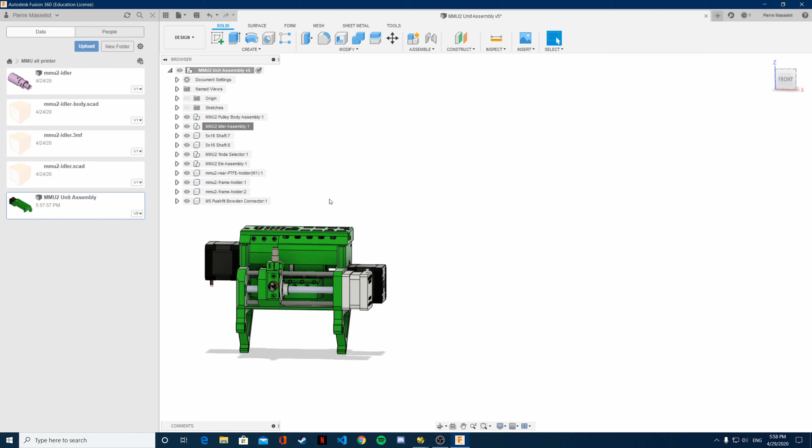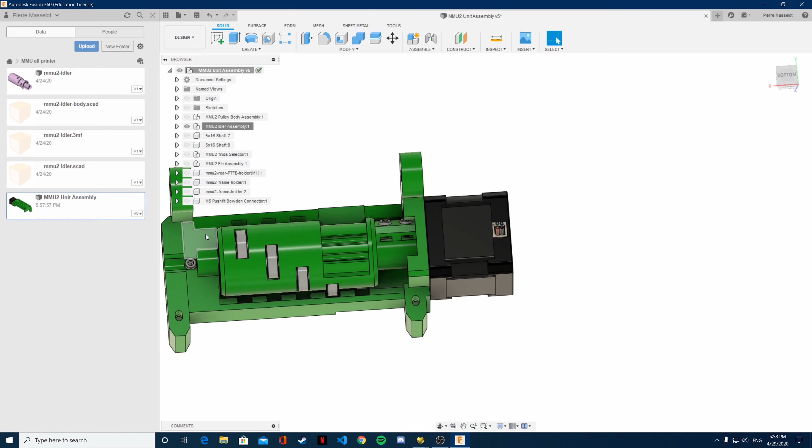So in this video I will show you the modifications that I did to the idler body. So I'm going to isolate the idler assembly right here. And so I've shown you previously the modifications I've done to the idler, which were bigger bearings and replacing the metal rod right here with a 3D printed one, so that you don't need to buy any extra rods, and replacing that bearing inside the idler into a bearing mount on the idler body.

I am currently doing another modification which I've not included in the video, which is making the tolerances in the motor shaft mount a little bit bigger, because I had problem fitting the motor on the previous model.

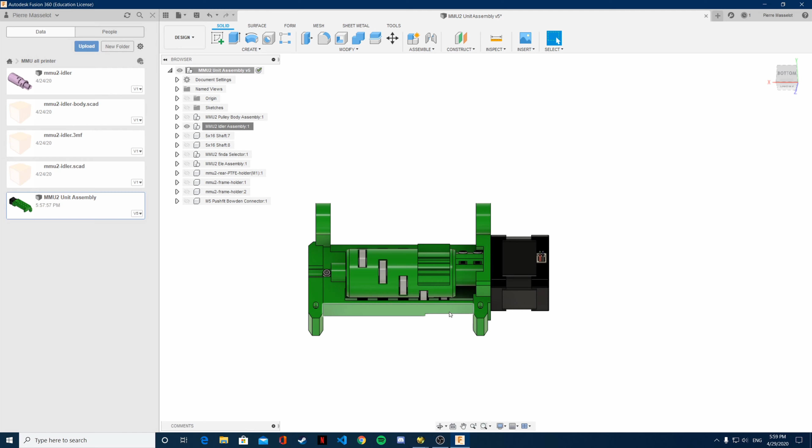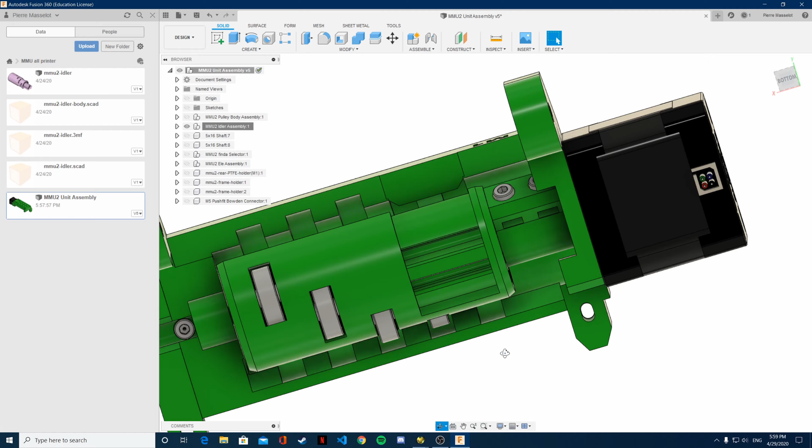So now what I'm going to do on the idler body is, as I said before, making a bearing mount, and also reducing this end stop size, because as you've seen in the previous video, because I'm using bigger bearings, I need to make this end stop a lot smaller, but it still works. So I'm going to make it a lot smaller, a few millimeters large,

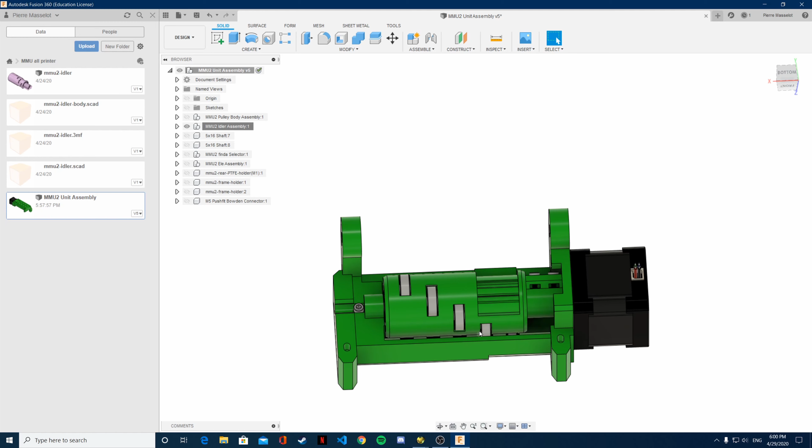and also make this hole for the motor right here a little bit larger, so that I have enough space to assemble the thing, because now we're not using a rod that we place. We have to slide it first through the hole, then inside the bearing, and then place the motor. So it's a bit trickier to assemble, but with these modifications it should be pretty straightforward.

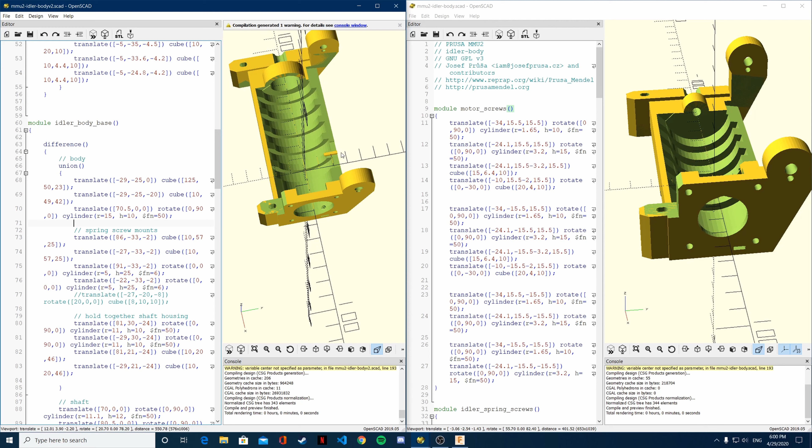What we're going to do now is look at the differences in the two CAD files. So let me minimize this. Okay, so on the left you have the new one, and on the right you have the original one. So you can obviously see the shorter end stop here and the modifications. Now let's dive into the code and see what's actually different.

So the first difference is on the outer cylinder here, that is, let's say, defining how large the borders are. So on this one it's much smaller, since it's simply to house a rod, and on this one it's bigger because it has to house a bearing. So you can see right here it is 7 millimeters in radius, and on the new one it is 15 millimeters in radius.

The second difference is on the, let's say, inner cylinder. So on this one it is much smaller, and on this one it's much bigger. Of course, it's because we're using a rod on this one and a bearing on this one. And you can see here that on the old one it was 2.55 millimeters in radius, so you have 0.1 millimeters in clearance.

And on the new one I'm using 11.1, so you might notice that the clearance for the bearing is slightly bigger, but since I want to print this without any supports, it might sag down a bit, so it's going to be a tighter fit. So this is why I have a bigger clearance than on my previous model.

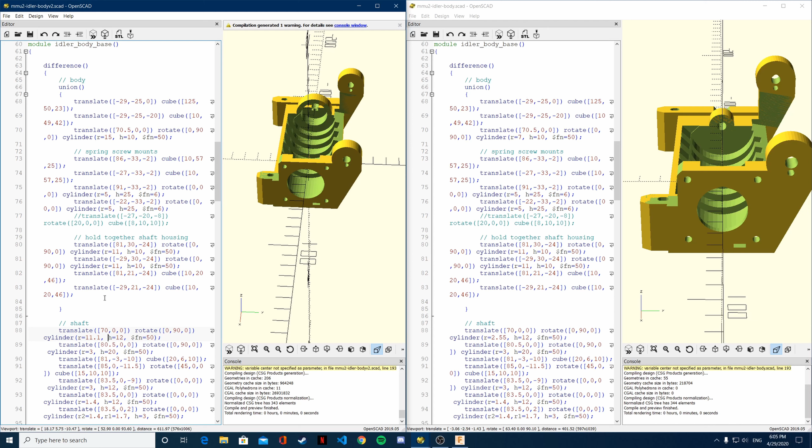Okay, now another difference in my design is the size of the end stop. So the original one is way larger than this one. So as you can see, we have moved the new one a bit to the left compared to this one. So here we translate it -1, so it's going to move a little bit to the right on my screen at least. And here translate 10, so it's going to be 10 to the left.

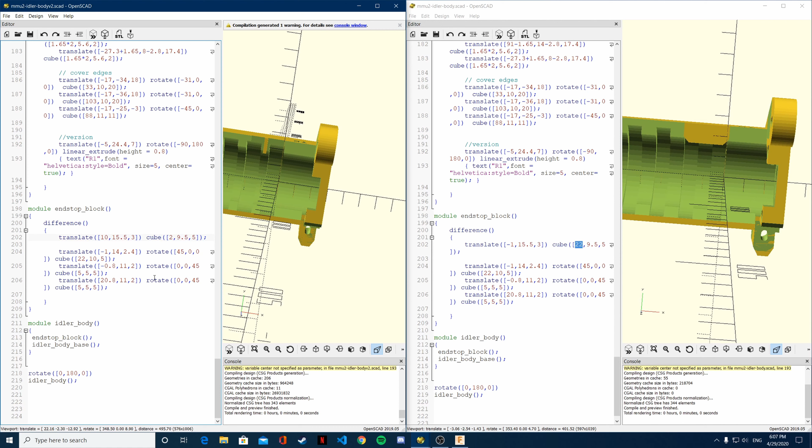So it's 11 millimeters further left than the previous one, and now we have made it also way shorter. So here it's 22 millimeters, and here it's only 2 millimeters, so it's 10 times shorter. So yes, it might not work as well, but I think that it will do the job. Now there are not any other differences for the end stop. This is the only thing I've modified.

Now we'll take a look at the simple modification of making the motor hole bigger, so that we can assemble the thing way more easily. Okay, and in order to do this modification, what you need to do is edit in the idler body the radius of the second cylinder, which is the hole for the motor mount, and it is 11.5 millimeters on the official version, and on my edited version it is 14 millimeters, so it can fit the assembly.

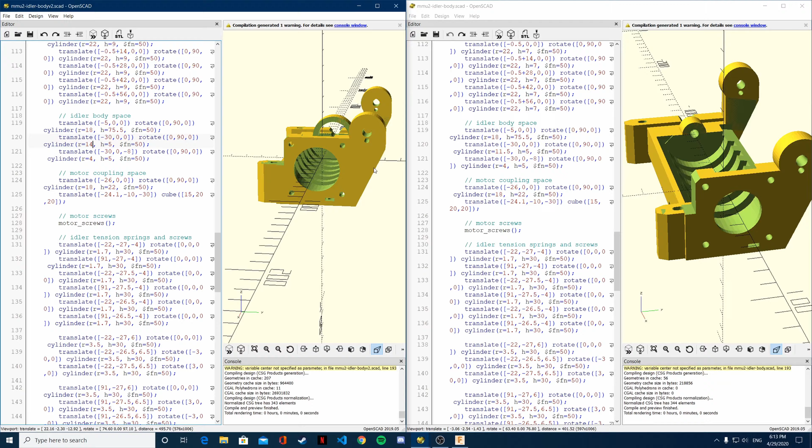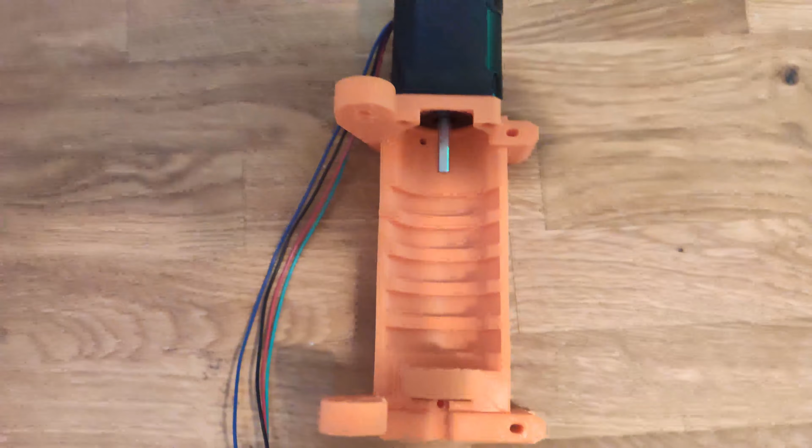So what I will do now is I will show you the final result. Okay, so this is the final product. It printed flawlessly, as you see. I'm going to show you the different steps that I went through in order to have that result, because I went through multiple prints in order to have it work. So this is the original print. This is my second print.

I realized I had to increase the motor hole size, and the bearing mount was too small. The third print actually was an attempt at a print, because I had a clogged nozzle, so I changed it and then reprinted it, and it worked. Well, not that well, since the bearing mount broke because I had forgotten to save my changes.

So on the next print, I also increased the bearing size way too much. So the bearing mount didn't break, but it was too big, so the bearing was wobbling inside. And this is the last and final print, which works perfectly. So as you can see, I don't have the idler in it yet because I'm reprinting it with bigger clearances for the shaft.